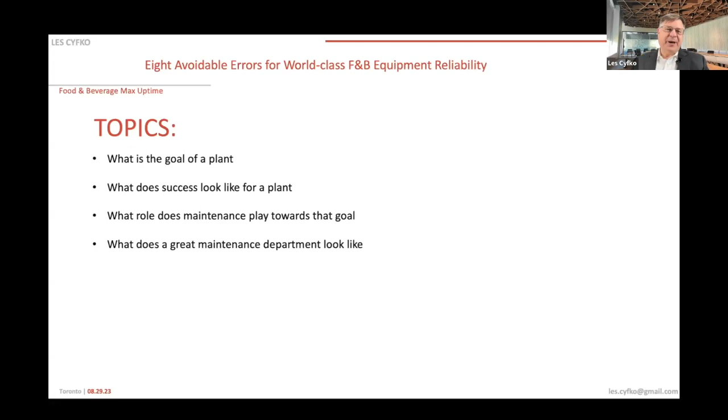So let's start with what a plant does. Essentially, a plant converts raw materials, inputs, into finished goods, outputs. Very much like in a Lean Six Sigma world, some of you have heard of SIPOC: supplier, input, process, output, customer. Well, the process is the plant. And let's be real here. Plants typically cost a lot of money to build, millions of dollars. There's a lot of capital invested in a plant. Sometimes we forget that. So there's an expectation, although plants are typically not a profit center, plants are cost centers,

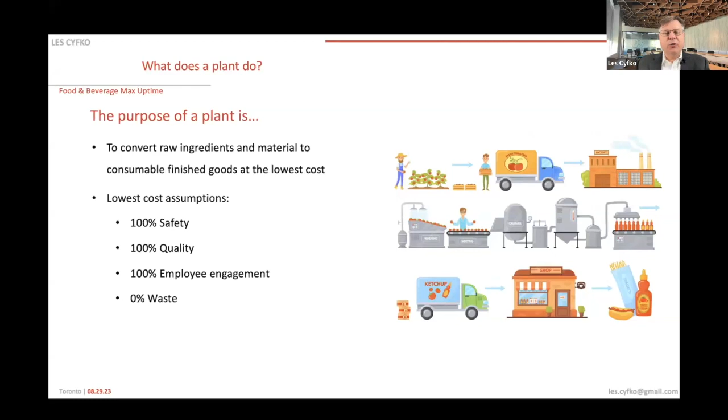and there's an expectation that not only does a plant run at least below the budget that's allotted to the plant from an operational perspective, but even further lower than that to recoup a lot of the capital investment that was used to build the plant in the first place, or a particular line, or whatever the case may be. And if that wasn't hard enough and daunting enough a task, plants have to run with 100% safety, with the goal of 100% quality, obviously meeting all the food safety regulations, 100% employee engagement, and driving to zero waste. It's a lot.

So for a food plant to be successful, it has to comply again with OSHA safety regulations. Obviously, GMP, the FDA or equivalent in whatever jurisdiction you may be in, and food safety regulations. The equipment has to be reliable. Nothing worse than walking into a plant that is basically a parking lot. The lines aren't running, and I think pretty much you all know what I mean by that. Motivated and engaged employees, and you can tell by walking a plant if that's the case, and operate sustainably.

So sustainably here is everything from the environmental perspective. Obviously, you want to protect the wastewater. You want to be zero landfill, and sustainably also means utilizing your energy resources as efficiently and effectively as possible, as well as sustainably also means cost efficient and cost effective.

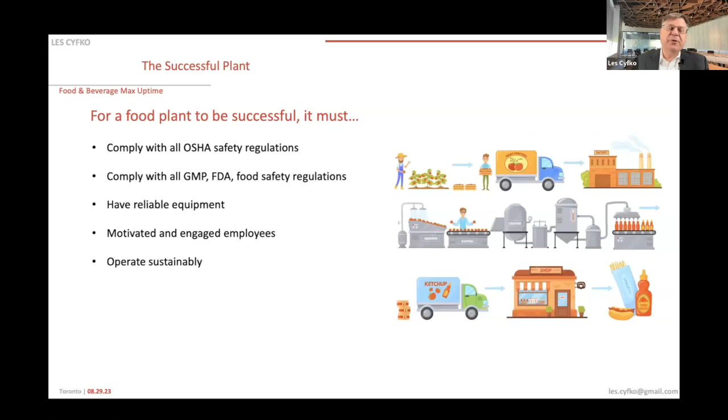I've been in plants that have been around for 85 years, the same plant in the same city, employing several generations of employees. That's sustainability. That's great for the community and great for everyone, all the stakeholders. So that's really what we're talking about in terms of a successful plant.

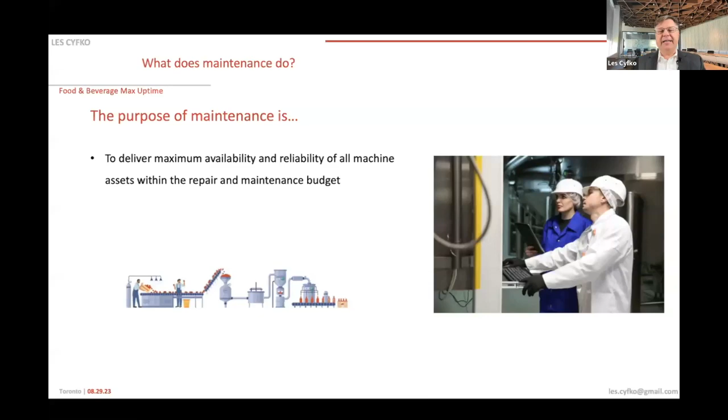So how does maintenance fit into this, middle of the SIPOC, this process of converting raw materials into finished goods? Well, maintenance is probably the most important department, I would argue, at least, to ensuring that a plant is successful. And really, in a nutshell, what maintenance does is deliver maximum availability and reliability of all machine assets within the budget that's allotted to maintenance, so at the lowest cost possible.

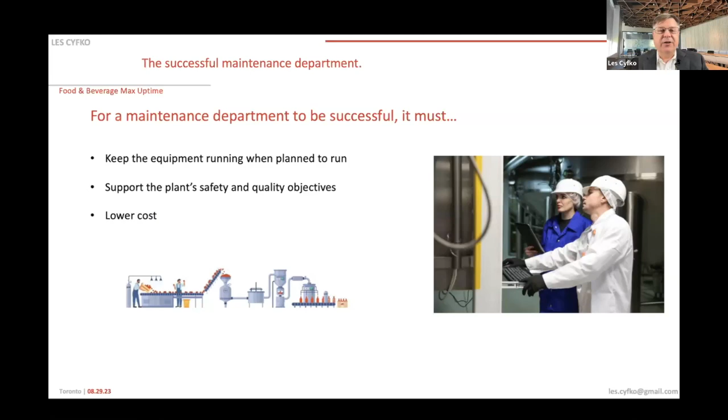The successful maintenance department must keep equipment running when planned to run. We'll talk a little bit about planned and unplanned downtime, support the plant's safety and quality objectives, and lower cost.

All right, so we'll get right into it. 8 avoidable errors for world-class food and beverage equipment reliability. Now, this is not a comprehensive list. I'm sure you'll have some ideas or some thoughts that are maybe in addition to the ones I mention. What I'd like to do, though, is start with framing up a production line, some helpful analogies to looking at a production line.

So when I was really young in beverages and in high-speed beverage lines, some of the smartest people in the business, at least I thought so at the time, and I do believe to this day, they often looked at production lines and compared them to airplanes. And so the idea would be that obviously you do a pre-flight at startup, and then you start up your line, and it should run flawlessly without any interruption, like an airplane in the sky, until you land the plane at the end of the week, and then you do maintenance on the plane at that point, and then you do a pre-flight again, and you start up the line again.

So the idea is, and it's a pretty neat analogy, because the concept is 100% uptime, and we expect that in airplanes. Let's face it, many of us travel and we're in an airplane. We expect that plane to make it, right? And planes have come a long way. So if we can do that for airplanes, obviously the business model is a little bit different, but if we can do that for airplanes, then we should be able to do that for our production lines. So that's sort of the goal of the maintenance department, to think of lines in terms of airplanes.

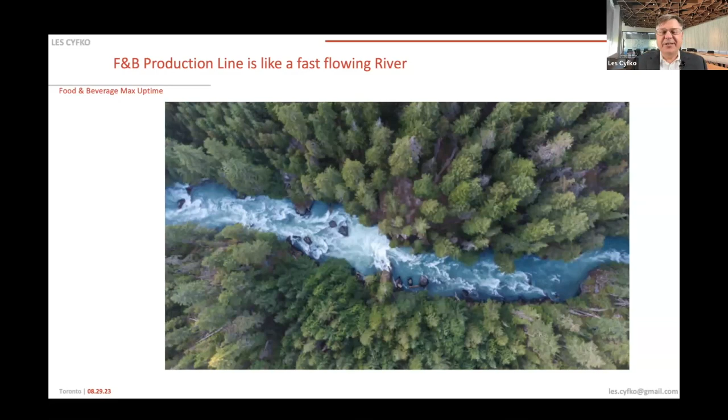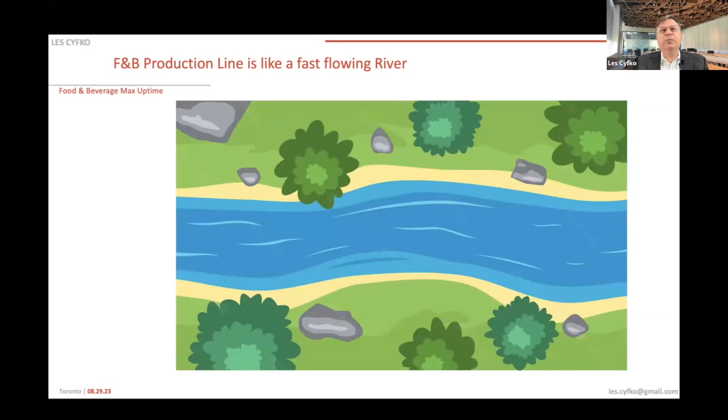So in addition to thinking of the production line as a river, I'd like you to picture that every facility, every plant has its share of beavers. And the beaver can build a dam. These virtual beavers, if you will, can build dams on your line, stick by stick. Sometimes it feels like they build these complex dams pretty quick, I guess, with a bit of teamwork among themselves. And we don't see these beavers. They're virtual beavers, but they do give us signals that the flow of the line is starting to be disrupted, and so these beavers certainly do exist.

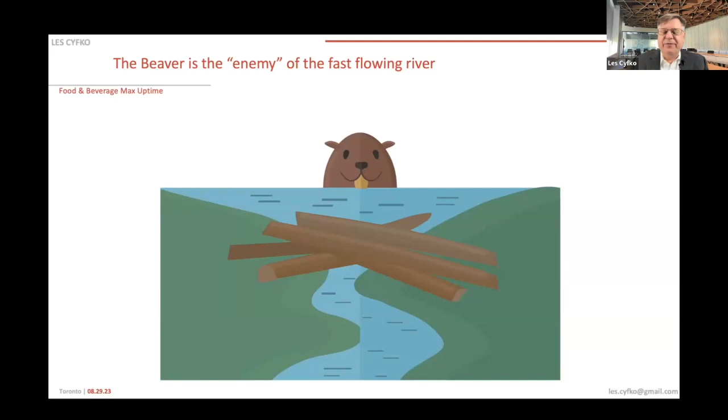Now, just as a footnote here, I'm not anti-beaver. I really like beavers, and I think they're important to our ecosystem and everything like that. So when I say the beaver is the enemy, I don't really mean they're the enemy in real life. I just mean the virtual beavers in the hidden factory, in our factories, those are our enemy. So it's like in Six Sigma, we say variation is the enemy. In this case, that variation, if you will, is made manifest through these hidden beavers across our production lines.

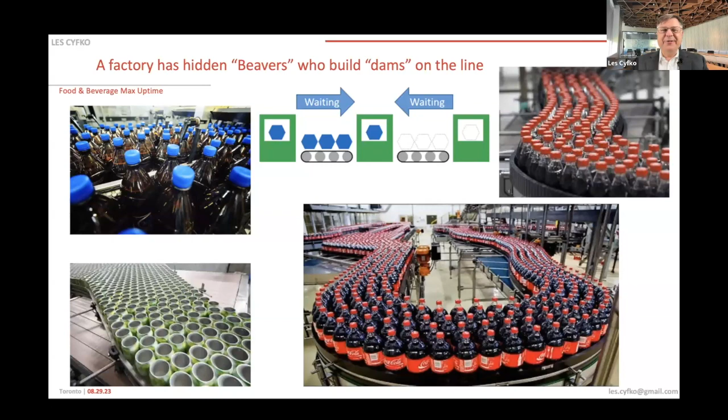So this is what we're going to unlock as we talk about, without any further ado, the 8 unforced errors. And so here's number 1, not having a CBN. So CBN is compelling business need. And a compelling business need is something that ultimately for maintenance the maintenance manager, maybe with the plant manager, plant director, will work on. It really gets down to the nitty-gritty of what's our goal? What are we looking to accomplish either this year or over the horizon in terms of our maintenance department? What can we rally around in terms of our business need today?

Now, the compelling business need obviously should be somewhat aligned to the vision and the mission of the plant. And when I was plant director, for me, the vision was to be the flagship plant in a flagship division, and the mission was 100% employee involvement, 0% loss or waste. So if you want to use that as an example, the compelling business need for maintenance can be 100% capacity or unlocking capacity. It can be proliferation of SKUs. It can be 100% uptime. There are different things you can use. You could be a flagship department in a flagship plant, in a flagship division, something like that.

Bringing smiles to your customers, whatever it is, but you have a compelling business need, which is very important to be able to come back to first principles when you talk to employees, your own staff, and everyone around you. So everyone has a clear perspective on what it is you're looking to accomplish as a maintenance team.

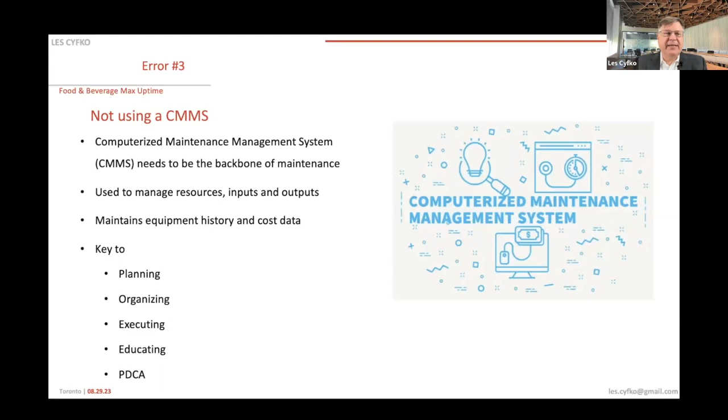And how do you know that? Well, A, it's ordered against a work order. B, it's ordered against a machine asset. So you've got those two things, and you need the part for this machine, for this work order. It makes sense, right? Then you have a context around why certain parts need to be ordered. So obviously a CMMS can do this and much more, but it's definitely something that needs to be in place and utilized.

Error number 4, not using KPIs. Well, there are dozens of maintenance KPIs, and I'm not a big fan of tracking every single thing. For me, it's really about the critical 3 when it comes to pretty much anything in plant operations. What are your 3 big bets? What are your 3 biggest downtimes? What are your 3 areas of focus? What are your 3 most critical lines? So it's really getting down to, let's call it, 3 to 5 priorities.

KPIs for me, there are many again, but my favorite 5, number 1 is PM completion percentage. So what does that look like? It means you've planned your work and you work your plan. Of all the PMs that you've planned, what's the percent of PMs that you've actually accomplished? And obviously make sure that nobody's canceling PMs, or at least you're tracking that, so that it's a real number. You definitely want a real number.

You don't want to run into a scenario where you're showing the CEO or the senior leaders in the organization that your maintenance scorecard is green, you've got 100% PM completion, but your OEE or running efficiencies are 20 or 30, well below world class. So the two should go hand in hand. If you're doing the right PMs and actually doing them properly, you're getting rid of beaver dams, so your lines should be flowing.

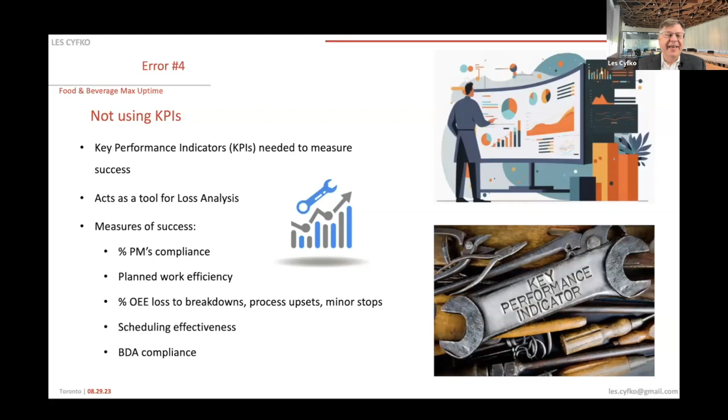So if you're actually nailing it from a maintenance perspective, and your maintenance team is busting those dams, and in fact anticipating where the beavers are, their favorite spots, and you're ahead of the game. You've got condition-based monitoring on, you're doing PMs, you're leveraging operator PMs, and as soon as those first few sticks are being planted, you're on it, you're removing them, and you're disappointing the poor beavers. Well, there should be a correlation, obviously, between your improvements in maintenance and your OEE. That's the whole point, right? So those are sort of my favorite KPIs.

Not prioritizing assets. So error number 5. Obviously, if you're trying to tackle everything, especially in a large plant, the plant I was running had 6 lines, now 7 lines with a variety pack. So you've got so many lines, so many machine assets, and you have to prioritize. Otherwise, if you try to cover everything, you end up covering nothing. And that will drive what kind of training and specialized training you need for your teams. It obviously prioritizes how you use your tools, your talent, your time towards which machines.

How do you prioritize your machines? I mean, there's various ways. Obviously, a lot of stakeholders should be involved in this, including sales, right? Because sometimes your machines are prioritized based on what's selling the most and where your capacity is maxed out. If you have a line that's running 24/7 essentially, and it's maxed out in terms of its capacity and utilization because of customer demand, then you definitely want to prioritize that line.

At Pepsi, one of the products that was and continues to grow in double digits is Gatorade. So any Gatorade line has always been a priority. Can lines as well; especially during COVID, there was a big shift to cans. And so can lines became a priority, and not just any can line. There were some can lines more than others. So you really have to get into that as well.

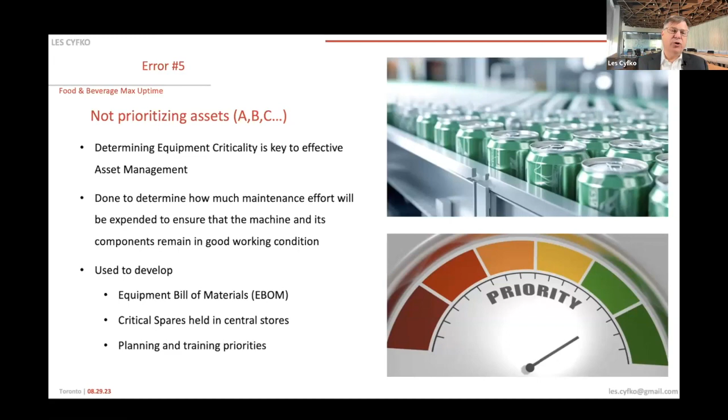All right, error number 6: not having regular maintenance planning meetings. So different than the daily or shiftly meetings with your maintenance team. Not having regular planning meetings is really around there's going to be a certain amount of PMs that need to be done, critical PMs that need to be done on any given week. There will also be a certain amount of PMs that will come up based on some inspections that have been done, maybe some operator inputs or downtime that's very recent, or maybe downtime that's a little chronic but growing.

So there'll be a list of PMs, and obviously in every maintenance department, there's a finite number of resources, time and people and trades. So given that, there needs to be a triage approach to prioritizing the PMs that are the most critical, and obviously in consideration of the most critical assets, as well as potential for being able to take the line down during the week, if possible.

So what I recommend is this. I recommend two planning meetings. Definitely at least one, and if it's just one, it'll be the Thursday or Wednesday. But if it's two, it's Monday and then the Wednesday or Thursday. So the Monday meeting, you're really doing a debrief on the weekend, if there was any maintenance work on the weekend, or at a minimum how startup went.

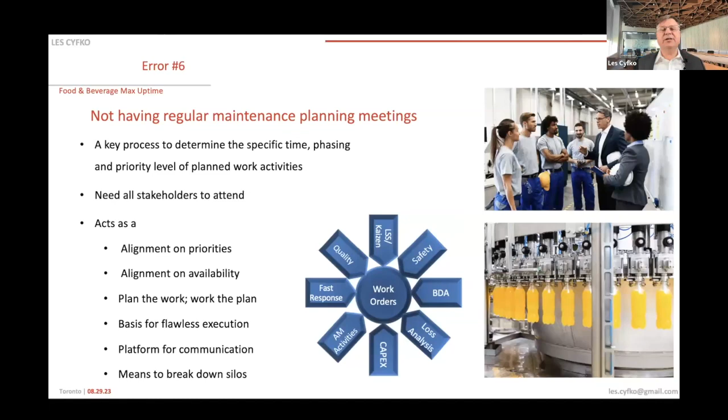Last, I want to point to the figure in the middle. Work orders. Work orders really touch on pretty much every single aspect of the plant. You have safety work orders, breakdown analysis, loss analysis, CapEx related work orders, AM activities, fast response. Fast response is like your daily shift meetings, quality, any particular LSS or Kaizen type of work orders that eliminate defects on the line. So that planning meeting for work orders really touches on pretty much every single aspect of your plant operation. So it's that critical.

Error number 7, not using a BDA process. This one I see a lot, I have to admit, because it takes a lot of effort. It's very interesting how in plants generally, it's mayhem when there's a big downtime event. All hands are on deck. And quite frankly, it's long forgotten the next day. As soon as the lines are running nice and the river's flowing, people actually high five, we got ourselves out of this crisis, and people are pretty happy and elated, much too happy to bother themselves with performing a breakdown analysis.

Well, breakdown analysis is critical because it's a training tool. Nothing's better than learning from your mistakes or learning from others' mistakes. So if you really want to progressively, in real time, improve the capability of your team, one of the best ways to do that is through breakdown analysis. Now, you don't only get to the root cause, you really drill down to the systemic issues with a proper breakdown analysis.

You also put together a table, a breakdown analysis table, a central spot where employees can visit to look at some previous breakdown analysis, can look at the trends, can really get to the plan, do, check, act type of mindset that is necessary for a plant to go from good to great. So it becomes sort of like a center of excellence, and it turns breakdowns into a positive thing.

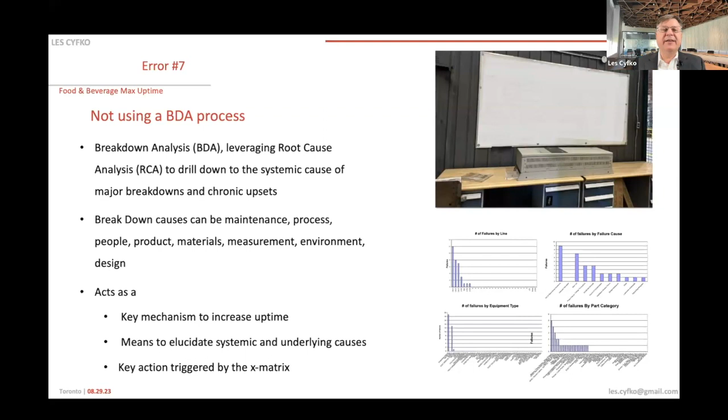And they say, yeah, we just changed our design a few weeks ago. Why? You're already starting to see some false stops and things like that. Maybe the sensors are not quite calibrated, or the program's old or has to be updated, whatever the case may be. Or maybe they're defective. So then you have that conversation and you caught it early. So you outsmarted the beaver, and nothing feels better than outsmarting a beaver.

All right. Error number 8, not using operator PM. So we spoke about autonomous maintenance, and I really want to finish off with this particular error. So again, more is better. It's better to have 1% of 100 people's efforts than 100% of one person's effort. And so if you expand the net, if you expand the team, if you have operators who are doing visual PMs, running PMs, and general PMs really to use their eyes, ears, nose, senses to keep their finger on what is changing in their process.

The beauty of that is you educate your operators to a higher level of knowledge and of thinking, and they're more apt to buy into plan, do, check, act and Kaizen and improvements. So they're more engaged.

They're learning more about their equipment, so they're less prone to create minor stops themselves as a result. They know their equipment, so you will get input, whether it's levels of lube, or whether it's fraying conveyors, or shards from a gearbox that are falling on the ground, that are accumulating on the ground. Now an operator writes down, there's some metal shards from this gearbox that's starting to accumulate on the ground, or whatever mechanics or electricians might miss.

While you have operators who will catch a lot of these defects and provide the information necessary to act on it right away, before the dam stops the river, you're acting on those things. Very important tool to have operator PMs on every shift, across every shift, ideally through some kind of iPad or tablet to facilitate it. But hey, look, it can be a paper process. That's fine too.

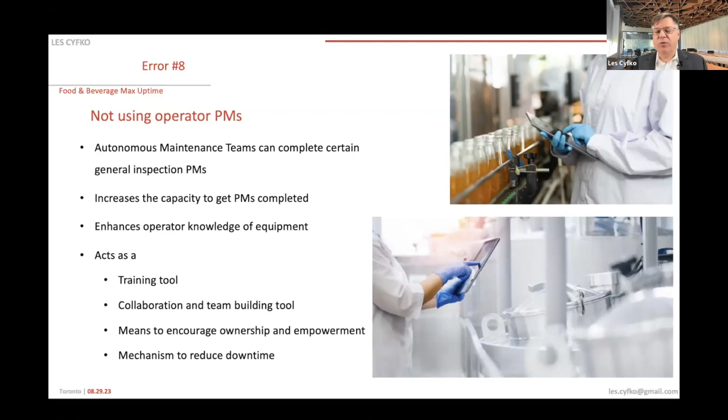What does that all amount to? Getting stuff done. Now, some people will use a different word for the S, but getting stuff done. We definitely want to get stuff done. That's the bottom line here. And all these process-oriented and people-oriented steps, or practices, are all geared towards getting stuff done efficiently and effectively. So we don't only want to get stuff done, but we want to get the right stuff done. That's what the TR is, the right stuff done. Why? Because by doing so, we bust the dam, and that's what we want to do. We want to bust the dam.

So there we have it. We've got this beaver now because we've gone through all these unforced errors and we've corrected them all and we're controlling what we can control. And you've got a beaver that's very frustrated. He doesn't look too happy. He's sitting there with a log, doesn't know where to put it because we're all on top of it. So he seems very frustrated, poor thing. But that's okay. I'm sure he won't stop what he's doing because beavers naturally just build dams. So he'll continue doing what he's doing. He'll just work a little harder.